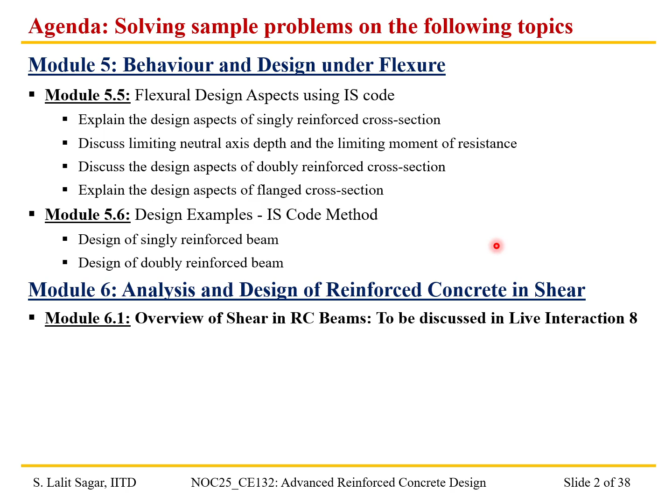In live interaction 8, we are going to take up the analysis and design of reinforced concrete members under shear as well as torsion. Without further delay, we'll be discussing almost 17 questions in today's session. This session will be a mix of conceptual multiple choice questions and numerical multiple choice questions, and I'll be here helping you solve the numerical problems and understand the conceptual problems better. So we'll start with the questions now.

The first question is, according to IS 456 2000, the code for reinforced concrete design, what is the area of the stress block for concrete in compression? And second, what is the depth of the resultant compressive force from the extreme compression fiber? Kindly take a few seconds and let me know what is the correct response.

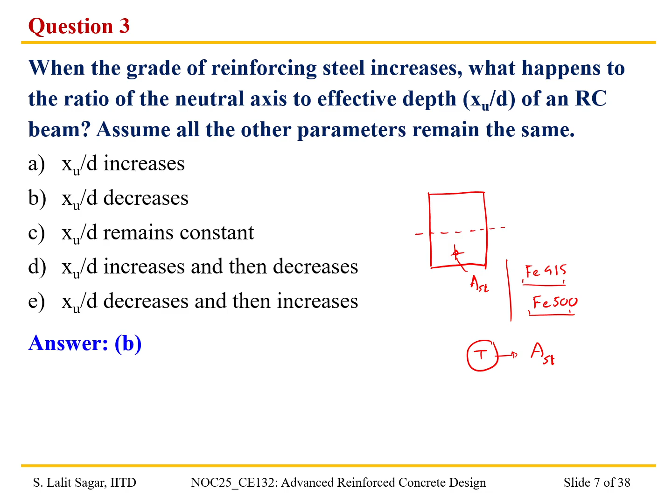The other way of looking at it is that when we increase the grade of reinforcing steel, the area of steel may decrease. So what happens is that the XU value also decreases in order to balance this tensile reinforcement, and the XU by D ratio also decreases. So using this equation, and the physical explanation based on mechanics, we can say that when we increase the grade of reinforcing steel, the ratio of the neutral axis decreases.

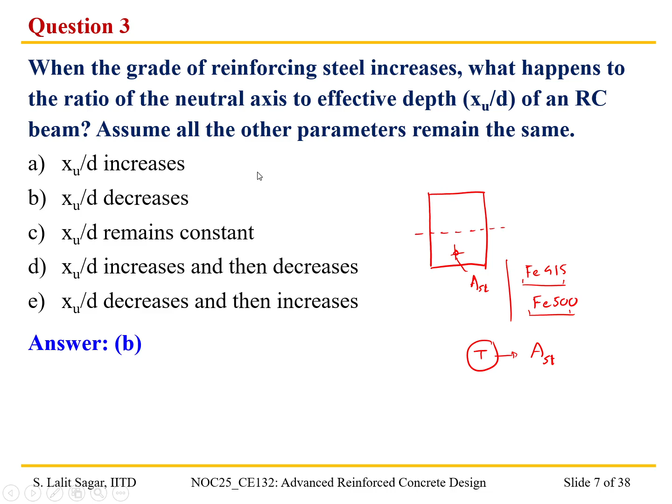So moving forward, question 4. According to IS 456-2000, a reinforced concrete beam is typically designed as which type of cross section, and what is the corresponding failure mode?

Yes sir, under-reinforced section, tension control failure. Thank you for the response.

As you rightly mentioned, option F is the correct response, because whenever we are designing a reinforced concrete beam, whether it is a singly reinforced beam or a doubly reinforced beam, we are going to design it as an under-reinforced section, and we are going to make sure that it is a tension control failure.

So in question 5, we need to answer: in the analysis and design of reinforced concrete beams under flexure, what is the expression for term R? Please take a few seconds and let me know what is the correct answer. This term R is particularly used in option B, R equal to Mu by FCK BD square.

Thank you for the response. So we look at the answer. It is option A actually, as per the design aids, that is SP16, 1980. There are certain charts which are provided in order to help us in the design of reinforced concrete cross sections.

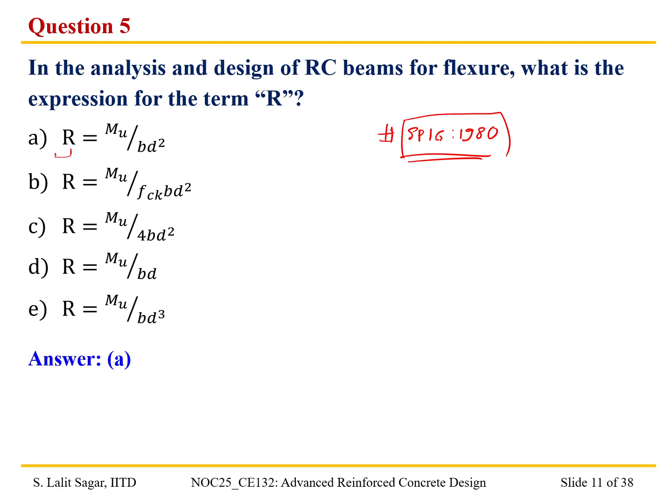According to that, we take the help of this R factor, and this has been adopted from the lecture slide also. We are going to discuss and show this R term in the SP16 design aids or the code as well. So we are going to design the cross section based on this R value. From the perspective of analysis and design of reinforced concrete members for flexure, this term R is Mu by BD squared. Kindly note that, and we will proceed with the next question.

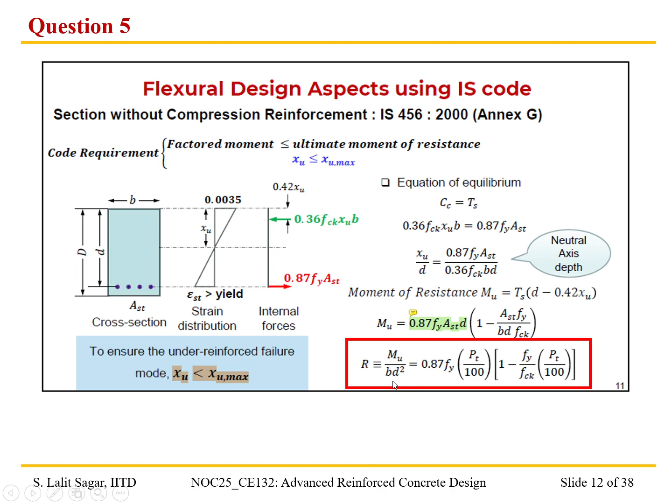As you might have seen in this week's lecture also, once you obtain the value of R, there are two methods of determining the area of reinforcing steel. We are going to look at that in little more detail very shortly. So essentially, what we need to note is that R is given by Mu by BD squared. We'll proceed to the next question.

So we have a numerical example or sample problem. We have a beam with a width of 250 millimeter and overall depth D of 450 mm. The concrete has a characteristic strength of 30 MPa FCK, and the beam is reinforced with 4 bars of 20 mm diameter, with grade of steel 500 MPa. It is reinforced only on the tension side. Assuming moderate environmental conditions, that is a cover of 30 millimeter and 10 mm transverse reinforcement being provided, what is the depth of the neutral axis as per IS 456 without considering the limiting depth?

Kindly take a few minutes and let me know the correct response. I'm going to provide a hint. What we are looking at basically is a reinforced concrete beam which is reinforced only on the tension side. So based on force equilibrium, we need to identify what is the depth of the neutral axis without considering the limiting depth.

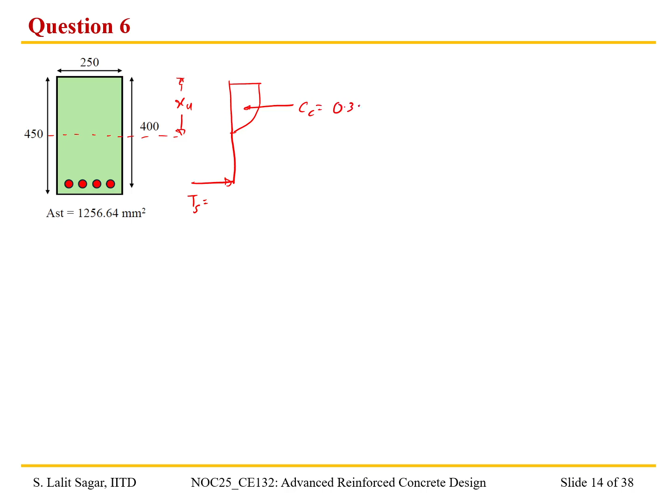As we have already looked earlier, the resultant compressive force is 0.36 FCK into XU into B, considering the width of the cross section, and the resultant tensile force in the rebar is 0.87 Fy into AST. Now, for the equilibrium of the cross section, we need to equate these two forces, that is Cc equal to Ts. Putting the forces: 0.36 FCK into B into XU is equal to 0.87 Fy into AST. So we can obtain the value of XU as 0.87 Fy into AST divided by 0.36 FCK into B. Kindly substitute these values and let me know what is the correct answer.

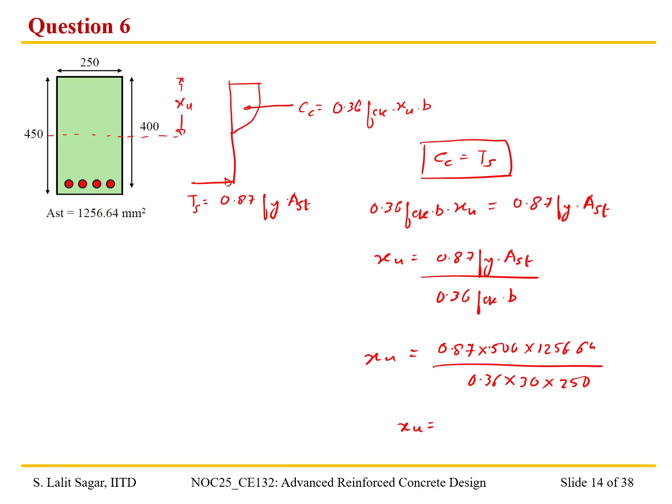Okay, so if we were considering the previous parts of the module, if we just remember the analysis of the reinforced concrete beam considering the material properties, we might have gone ahead with the depth of the neutral axis. So just out of curiosity, let us try to find out the ratio of Xu by D. Let us see what insights that is going to give us.

Okay, so Xu by D. We need to determine the effective depth. D is equal to total depth minus clear cover. Clear cover is 30 millimeter, and then we have the stirrups, that is 10 millimeter, and then another 10 millimeter, because we are going to consider half of the diameter of the tensile reinforcement.

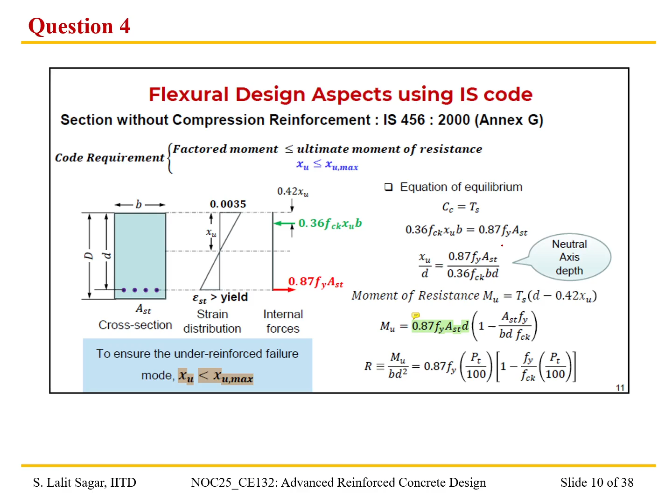Okay, for those who are wondering how this value of Xu max by D ratio is coming, I would like to refer to IS 456, table number 4.2, sir. Yeah exactly, sir. So that is the standard reference, and it has been reiterated in the lecture slides also, that for different grades of reinforcing steel, we have different values of Xu max by D, and it is essentially obtained from this strain distribution across the cross section by using the similar triangles.

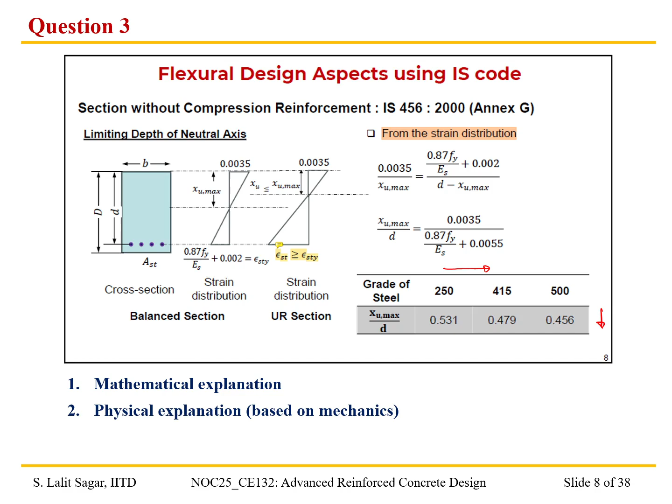So we can actually plug these values and see, when we plug different values of Fy, we get the limiting depth of neutral axis. That is the ratio of Xu max by D for Fe 500 is 0.456.

And in order to determine the moment of resistance, what would be the value of Xu? So basically, we have two values of Xu. In the previous question, as per the analysis, without considering the limiting value, we found out that it is 202.5, and presently we have 182.4. So we have 202.5 and 182.4. Out of this, which value should we consider for the analysis to determine the moment of resistance?

It's xu max. Yeah, absolutely. Yes, so you have answered correctly.

As we were discussing in the previous question, the IS code has inherently certain partial safety factors, and whenever the xu/D ratio exceeds xu_max/D, we need to consider the limiting value of xu_max/D. Correspondingly we consider the lower value, 182.4, and the correct answer for this question is option E, since the limiting depth is the same as the depth considered to determine the moment of resistance of the cross section.

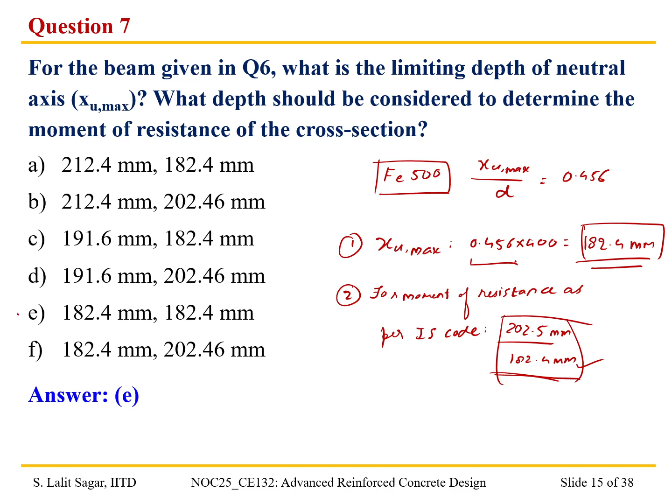So we'll move on to the next question.

For the beam given in question 6, what would be the ultimate moment of resistance and curvature as per IS 456:2000? Kindly take a few minutes and let me know the correct response. I will also start solving the problem with you.

Moment is 165.6 kilonewton meter.

Okay, were you able to solve it and obtain the answer? I used this one, 0.138 into FCK B into D square, that formula, mu limit. Okay, okay, that's great.

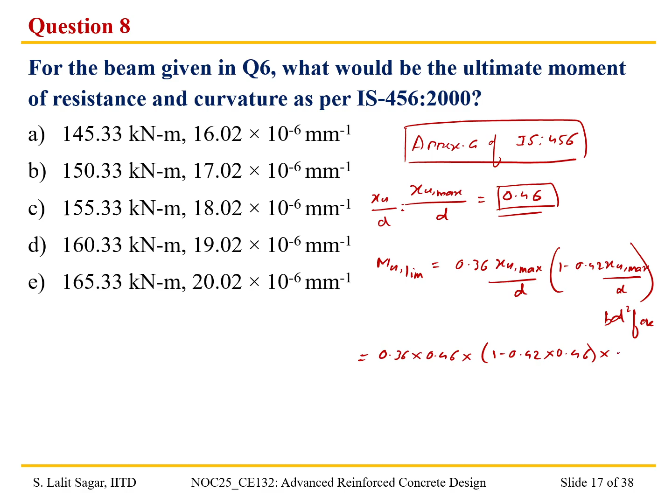Let us start plugging in the values to find the answer: 0.36 into 0.46 into (1 minus 0.42 into 0.46) into B, which is 250, into 400 square into 30. Based on this, I got a value of 160.33.

So I'm getting the correct answer as option D. Okay, sir, got it.

We can actually solve using the other formula also that you mentioned. Let me just open up the module. Sir, can you tell me what slide number you were referring to? We can cross-check with that formula also.

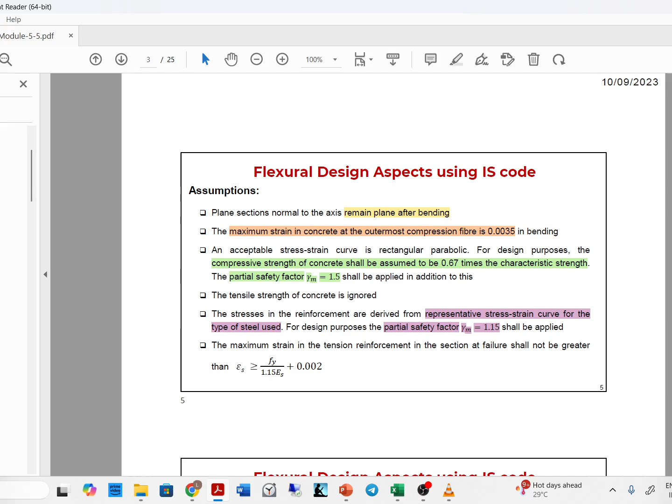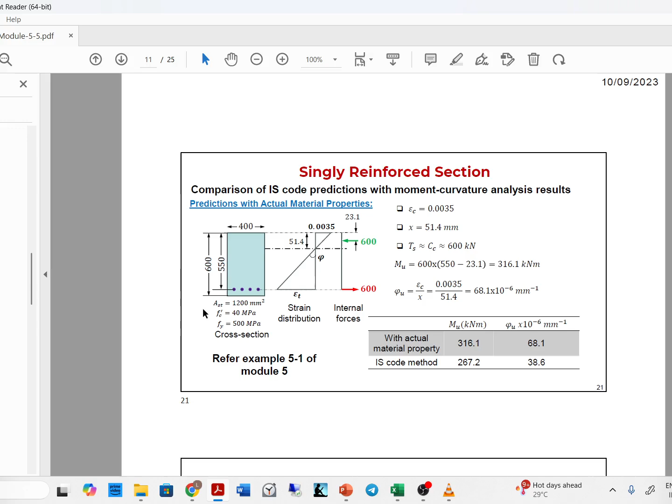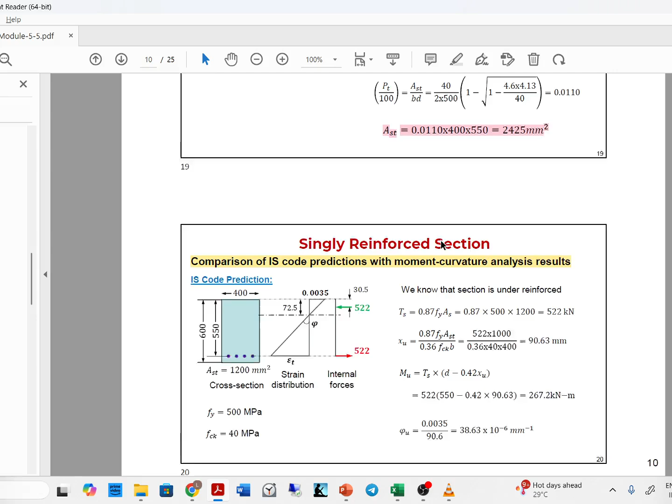Couldn't remember it exactly, but MU limit equals 0.138 FCK B into D square. Is that correct? Yes, sir. Does it correspond to FE 500 grade? That was actually FE 415. So we need to consider that this problem is for FE 500, and I think the equation might be slightly different for FE 500.

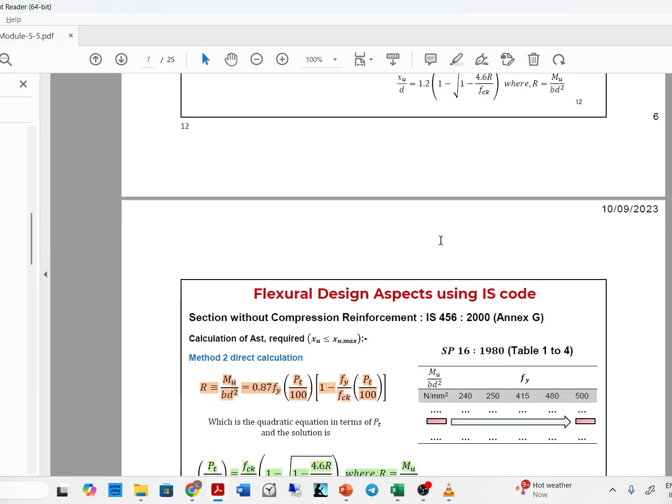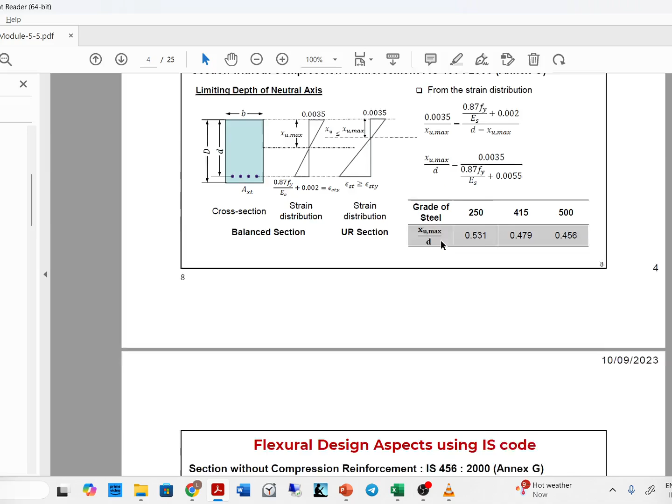I will get back to you and check what the equation is for FE 415 and FE 500. Anyway, the safe thing to do is to follow the IS code formula, which is well established. I'll look for it in the IS code, or maybe SP16, and let you know, perhaps in the discussion group. So the correct answer is option D, 160.33.

While we are at it, let us also find the value of curvature. We'll box it here. The curvature phi is epsilon_c divided by xu. Epsilon_c is 0.0035, and xu is 182.4.

Let us find out the value. So which is giving me a value of 19.02 into 10 power minus 6. Yeah, absolutely. So option B is the correct response.

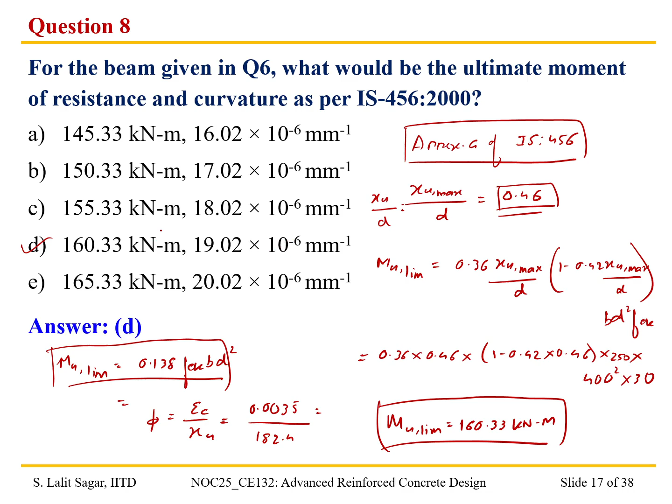So we'll proceed to the next question now. We have evaluated the moment capacity and the curvature as per the IS code. Now for this question, we need to determine the ultimate moment capacity and the curvature corresponding to the actual material properties. Kindly take a few seconds and let me know what is the correct answer. I will also start solving the problem along with you.

So how do we find out? For this, we know that we need to determine the depth of the neutral axis, that is X, by trial and error method. So we'll go to the Excel sheet and try to solve it using that. I hope that my Excel sheet is visible.

Yes sir, visible. So we'll start substituting all the values. The width is 250, depth is 450, and the effective depth is 400, and the area of steel is 1256.64, and it will calculate the percentage of tension steel automatically.

Then ASC is 0, no reinforcement on the compression side. D prime we can leave it, and F prime C, so basically the characteristic strength is very much similar to F prime C value, so I'm going to put it as 30, and epsilon prime C, that is strain corresponding to the peak stress, that is 0.002, and Fy is 500.

So we know that for the strain in concrete, when the strain in concrete is 0.0035, this Excel sheet automatically calculates the value of beta 1 and alpha 1. So alpha 1 is 0.81 and beta 1 is 0.9.

So we'll write down those values. Alpha 1 is 0.81 and beta 1 is 0.9. We have already solved several problems in order to calculate these stress block parameters, so I'm going to skip that for the time being.

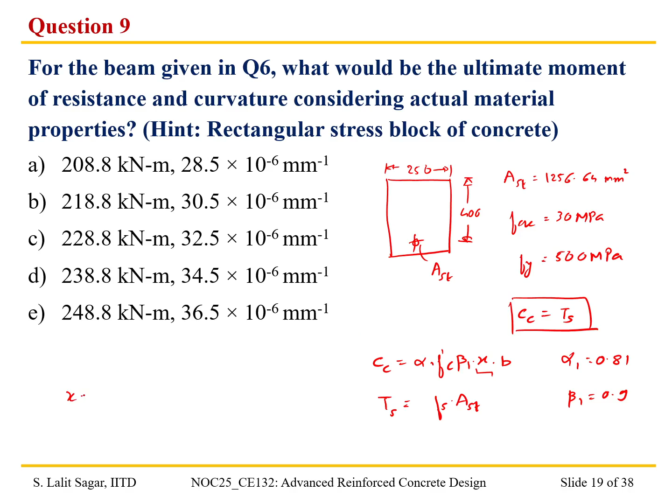So the tensile force is 628.3 and the compressive force is 628.4, so that is acceptable. So X is 114.9 millimeter.

Okay, so let us solve the problem by using the equations. So we have established the compressive force and the tensile force. Now the value of M is Cc into D minus beta 1 into X divided by 2. So first we need to find out the value of Cc, right?

So Cc is alpha 1 is 0.81, into F prime C is 30, beta 1 is 0.9, and X is 114.9, into B is 250. So can you please tell me what is the value of CC that we are getting?

628.21 kilonewton. Yeah, thank you so much. I think if we look at the Excel sheet also, we are getting the same value, that is 628.2. Let's write that, 628.2 kilonewton, sorry for that.

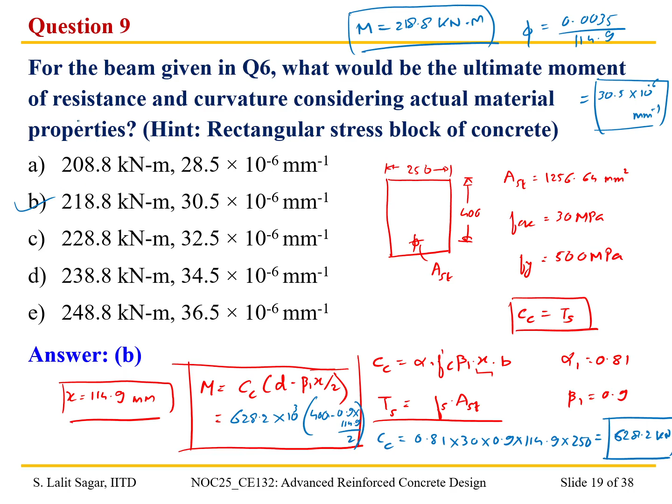So option B seems to be providing the correct answer. This is the moment capacity as per the material properties. As we can see, there is quite a considerable margin when calculating the moment capacity. So if we consider this particular cross section...

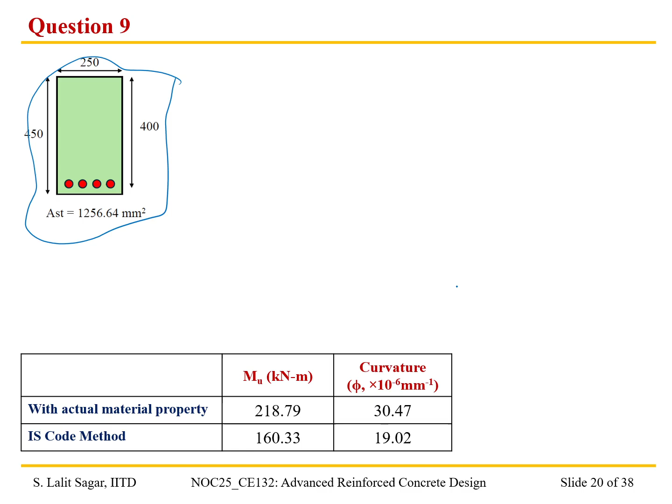Considering the actual material property, we obtain the moment of resistance as close to 220 kilonewton meter, and as per the IS code it is 160, and the curvature is 30.5 as per the actual material property, and the IS code is 19. So I think we can say that broadly there are two parameters which have affected this difference in results.

So I think the first parameter would be the limiting neutral axis depth, let me write XU. So because of limiting the value of XU, we are limiting the compressive stress block as per the IS code, and then the balancing tensile force is also less, as a result of which we get a very conservative value of the moment of resistance.

And secondly, the partial safety factors. So when we are considering the IS code, we are going to consider CC as 0.36 FCK into XU, that is the value.

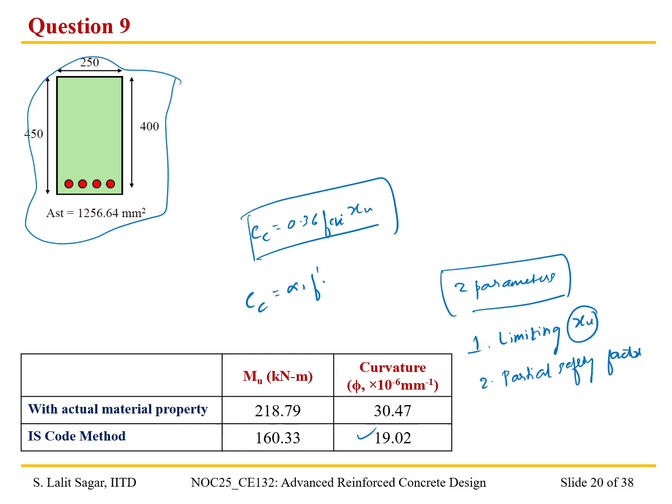But when we consider the actual material properties, CC is equal to alpha 1 F prime C into beta 1 into X. So if we consider alpha 1 as 0.81 and beta 1 as 0.9, this will become - let me just calculate - 0.9 into 0.81, that is 0.73. That is 0.73 FCK into XU.

So we can see that when we are considering the actual material property, the resultant compressive force is almost twice the IS code value, which results in higher values of mu and phi. So these are the two parameters which are the reason behind the enhanced values of moment of resistance and the curvature when considering the material property.

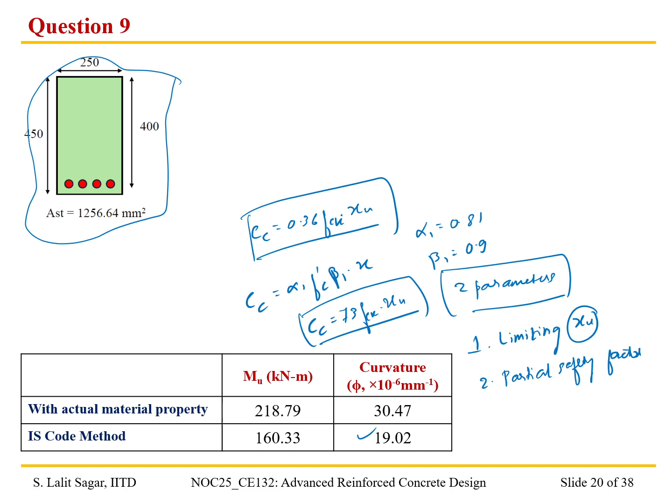Okay, so with that discussion, we can proceed to the next question, because we have another 8 questions for today. So without any further delay, we'll proceed to the next question.

So consider a beam of width 300 millimeter and overall depth of 500 millimeter, and characteristic strength is 40 MPa. If the beam is subjected to 250 kilonewton meter, will it be designed as a singly reinforced beam or a doubly reinforced beam? Please assume HYSD 500 bars are used and 10 millimeter stirrups are provided, and take moderate environmental exposure conditions. Kindly take a few seconds and let me know what is the answer.

So looking at the problem, can you please tell me what is the approach to solve this problem? So broadly, if you could tell me the broad approach, that would be nice moving forward.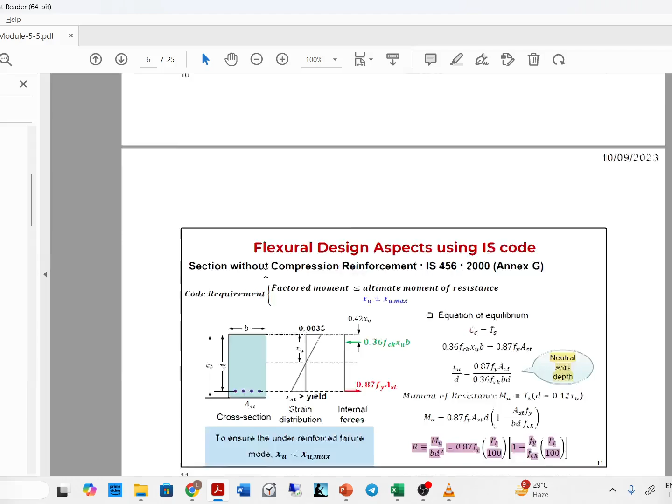If you look at this week's lecture, there are two methods given to calculate the reinforcing steel. Kindly calculate the area of steel required using the first method, that is by calculating the neutral axis depth from the moment demand. As a hint, let me go back to this week's lecture slide to help you locate where the equations are. I'm referring to slide number 12.

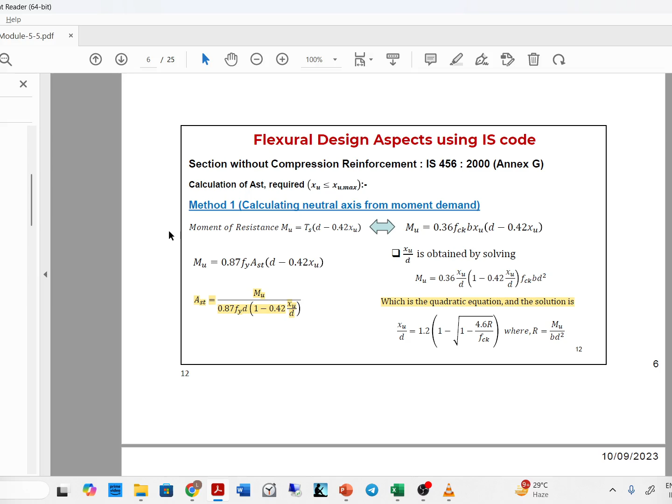So we need to calculate the value of R, which is equal to MU by BD square. Once we have the value of R, determine the ratio of XU by D, where XU is the depth of the neutral axis. Once we have the value of XU by D, calculate the value of AST. Please follow this method one. I'm going to solve it, and we're going to solve it simultaneously, and let me know what is the correct answer. Slide number 12 from module 5.5.

So we are going to obtain the value of AST using these two methods and see whether there is any difference. There should not be any difference, ideally, right? So basically, I think it's a three-step procedure that we are following over here.

So the first step is find out the value of R, which is given by MU by BD square. MU is 250 into 10 to the power 6, expressing all these in terms of Newton and millimeter. And B is 300, D is 450 square. I'm getting the value of R as 4.1152.

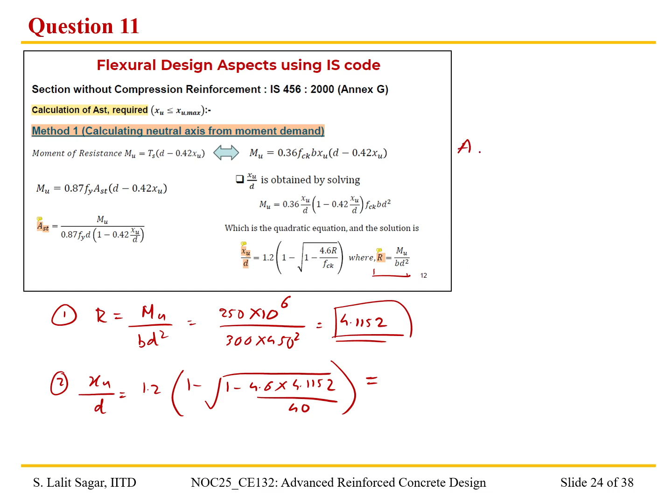Thank you for confirming that. We're going to take it up to the fourth decimal place to ensure accuracy in the calculations. Then we need to determine the ratio of XU by D. XU by D is 1.2 into 1 minus square root of 1 minus 4.6 into 4.1152 divided by FCK. The value of FCK is 40, if I'm not mistaken, which gives us XU by D, I got a value of 0.3291.

So one of the checks that I would recommend to all the students and participants is that, as we have seen earlier, this XU by D can exceed the XU max by D for the analysis using material properties. But whenever we are designing as per the IS code, it should never go beyond the XU max by D values. So for the current problem where we are using Fe500 steel, this particular value always has to be less than or equal to 0.46. This is one check that the participants can follow while solving these problems.

So we obtain the value of XU by D, then we can substitute that value in this equation. MU is 250 into 10 to the power 6 divided by 0.87 into 500 into D is 450 into 1 minus 0.42 into XU by D, which is 0.329.

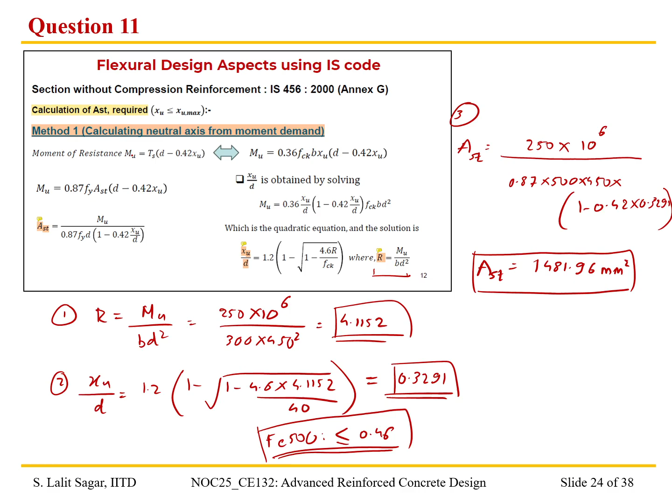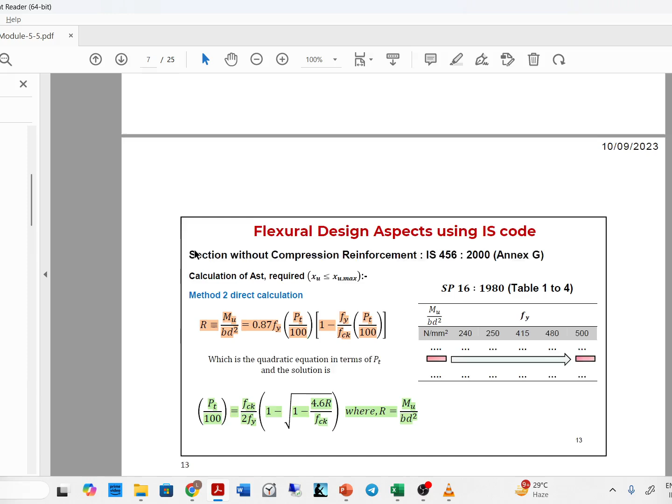So having found out the AST of the first method, let us proceed to take up the next problem. In the next problem, we are going to use the direct calculation method. I will show the hint once again. We have already found out the value of AST from method 1. In the direct calculation method, we are going to obtain the AST directly. First step is we are going to find out the value of R, which we already know, and then by using this equation, we are going to find out the value of PT, and from PT we are going to obtain the value of AST. So first step is find out R, which you already know, then find out the value of PT, and from PT we'll find out the value of AST. So we can start solving the problem together.

Okay, so we already know from the previous.

So from the previous part of the question, we know that R is equal to 4.11.

Okay, thank you for that. Going to write it here. So the first step is R is equal to mu by bd square, that is 4.1152.

So let us proceed to the second step, that is pt by 100 is equal to fck. Okay, let me write down the equation once again for better clarity: fck by 2fy into 1 minus square root of 1 minus 4.6 r by fck.

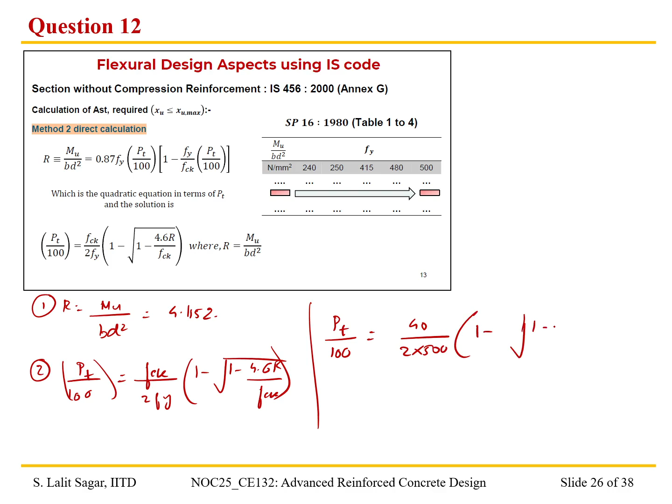Okay, we'll substitute the values and determine what is the value of pt that we are going to get. So pt by 100 is equal to fck is 40 by 2 into 500 into 1 minus square root of 1 minus 4.6 into 4.1152 divided by 40.

So when we solve this... let me write down the value of pt: 0.0109. I'm getting 1.09. In the percentages, no sir, like you have to multiply it by 100 to obtain the value of pt. So please check and let me know if you're getting this. Yes sir, we got it, 1.097. Yes, thank you.

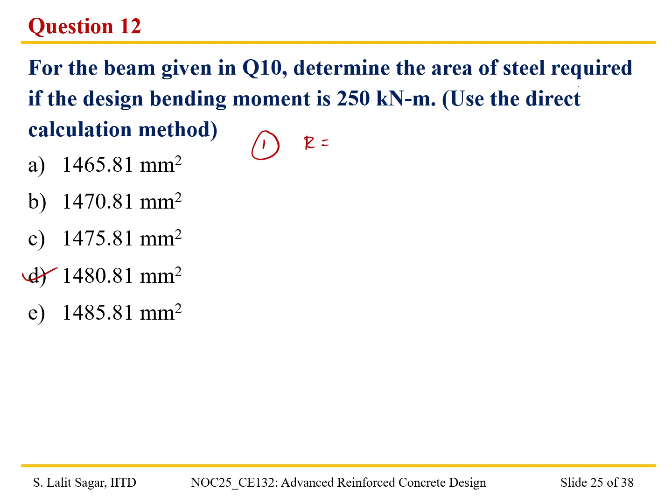So we'll go back and check what is the value of A that we got previously. So it is 1482, 1480, 1480.8, which is quite close. So in your assignments or exams, since we have validated both these two approaches in order to obtain the value of AST, please feel free to use either of them, and both will get you the same answers.

So with that, we can proceed to the next problem. I think for today we have another 5 questions and another half an hour, so we are doing well time wise.

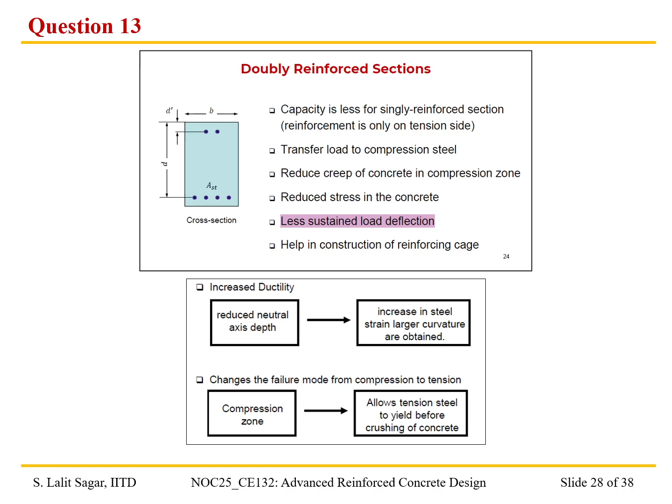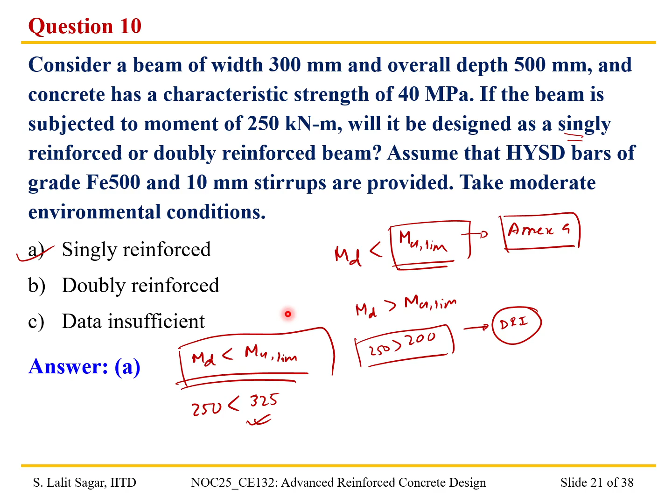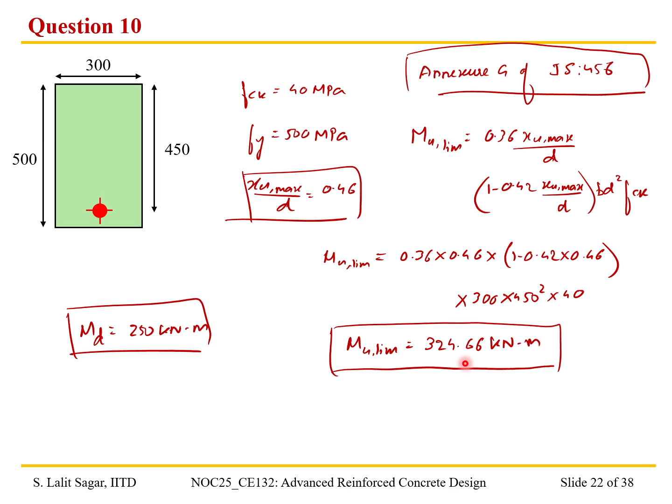The question we are presently discussing is the same as question 10. Width is 300 mm, depth is 500 mm, FCK is 40 MPa, and the HYSD bars have Fy equal to 500, with effective cover again 50 millimeter. So we can make use of the mu limiting value to obtain the answer for our current problem. Please note that mu limit is 324.66 kilonewton meter.

We are presently in question 14. In order to obtain the compression reinforcement, we use this value: mu minus mu limit is equal to FSC into ASC into D minus D prime. I think we have all the data required to obtain this value.

Let us have a look at this equation for a moment and try to see what we have and what extra data we need to solve this problem. We have the value of mu as 600 kilonewton meter, and mu limit is 324.66.

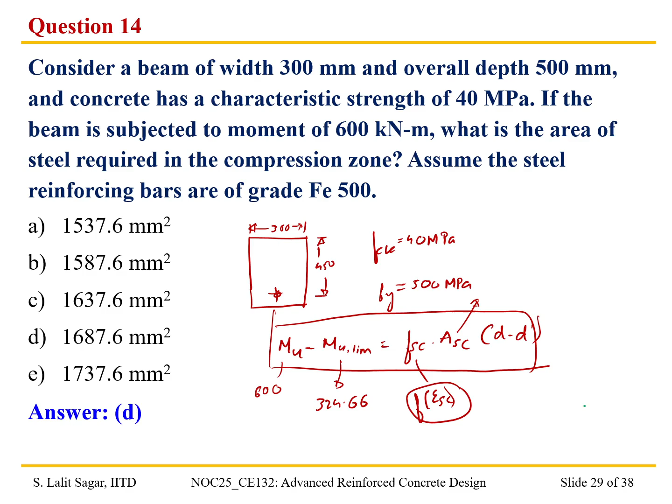So I think option D is giving us the correct value. So by using this equation and then by linear interpolation, we can obtain the strain, the stress corresponding to the strain in the compression steel. By using this equation, we were able to obtain the area of steel in the compression zone.

Okay, so we'll proceed to the next question now. So for the beam given in question 14, what is the area of steel required in the tension zone? We can start solving the problem now.

You can use the MU limit formula, sir. For which one, sir? This one? Yeah, sure, we can use that. Please wait for a moment, I'm going to solve it using the shortcut method. Okay, it's okay, sir, based on what sir has solved in the class, and you can use the same in your assignment as well as the exam also.

Right, so from the lecture slides, we can see that for the tension reinforcement, you can use this method where the value of PT limit by 100 into Fy by Fck can be simplified to a certain value depending on the grade of steel. So I'm going to start with this.

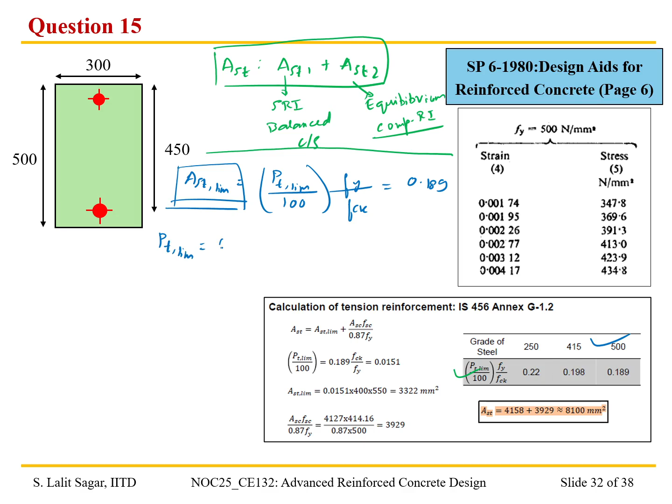So PT limit is equal to 0.189 into 100 into Fck is 40, Fy is 500. So when I simplify this, I'm getting a value of 1.512. So the PT limit value is 1.512.

Further, this PT limit is nothing but AST limit divided by BD into 100. So AST limit is equal to PT.

PT is 1.512 into B, which is 300, D is 450, divided by 100. Can you please tell me what is the value of AST limit? 2045.25 mm square. Thank you for the response.

I'm getting 2041. So this is AST1, the balanced area of steel for a singly reinforced beam. So now we need to obtain AST2 in order to balance the compression reinforcement. Let us do that now.

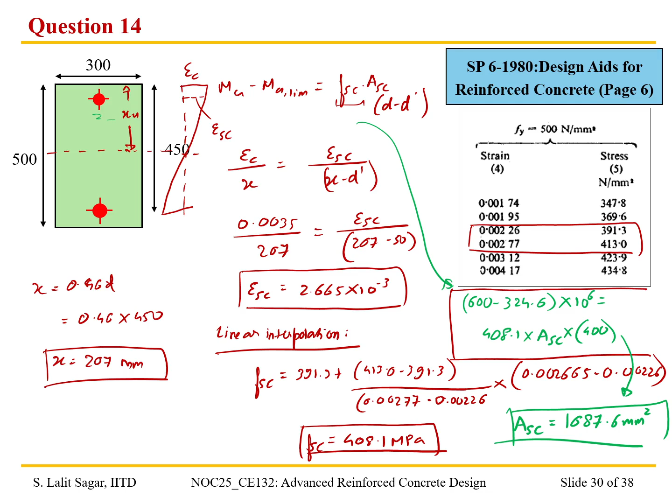So from this we know that FSC is 408.1 and ASC is 1687.6. Let me plug those values into this equation. FSC is 408.1 into ASC is 1687.6, divided by 0.87 into 500, which gives us the value of AST2 as 1582.42 mm square.

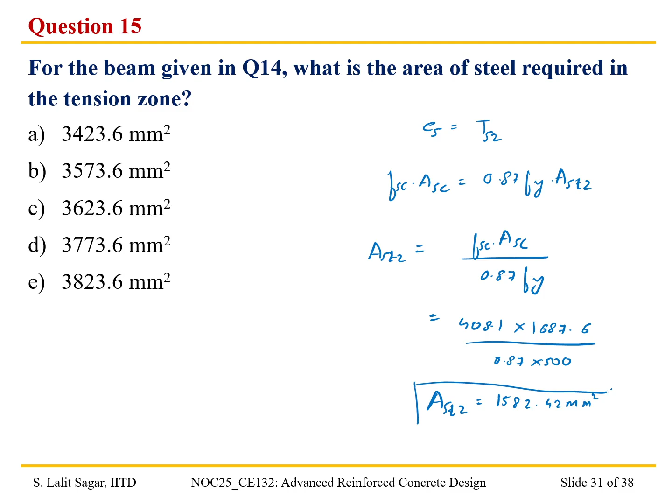As I said earlier, in order to obtain the total AST, AST is equal to AST1 plus AST2. Let me take a different color. So AST2 is 1582.42. What was AST1? AST1 was 2041.2. So the total AST turns out to be 3624.2, yeah, 3624 mm square.

So option C is the correct response. Thank you for confirming the answer.

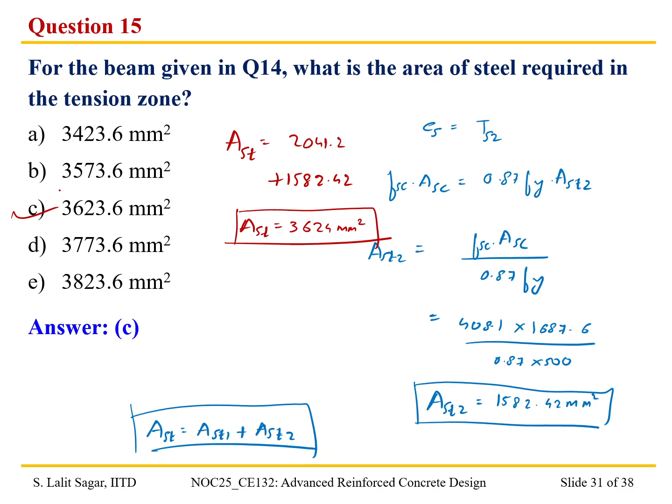So in this way, once we determine the value of ASC, we can obtain the value of AST. As I told earlier, AST comprises of two components. The first is the balanced steel corresponding to a singly reinforced balanced cross section, AST1, which has different values for different grades of steel. AST2 is obtained by equating with the force in the compression steel. Adding AST1 and AST2 together, we obtain the value of AST, and finally we get the answer.

So I think we have an opportunity to solve it using the Excel sheets. I'm going to start reading the data now, and then we can start solving the problem together. We have a reinforced concrete beam of dimensions 300 by 500 millimeter, and the value of FCK is 40 MPa. The beam is reinforced with 4% steel on the tension side and 2% on the compression side, and has an effective cover of 50 millimeter on both sides. What is the ultimate moment of resistance and curvature as per the IS code?

Okay, so we need to determine the ultimate moment of resistance and curvature as per the IS code. Kindly take a few seconds and understand the data, then we can start solving the problem simultaneously. Since this is an analysis problem, we need to take the help of the Excel sheet in order to solve it.

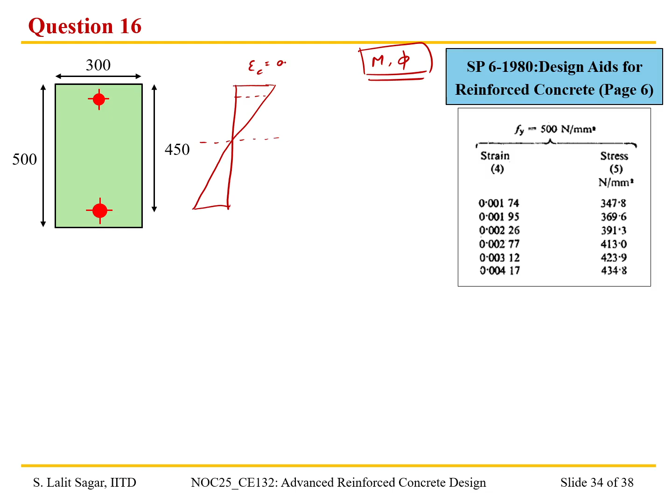So I think we already have the data over here. We need to determine the moment of resistance and the curvature as per the IS code, and we can take the help of this stress strain data in order to solve the problem. Let me draw the strain distribution across the depth of the section. We have epsilon c is equal to 0.0035, and then we have epsilon sc, steel in compression. Then we have epsilon s, and here this is the depth of the neutral axis, that is x.

Okay, now we have the stress block diagram. This is the tension in reinforcing steel, and this is the depth of neutral axis. It follows a partly rectangular and partly parabolic profile. This is the resultant compressive force in the concrete block, and here we have the compression from the steel.

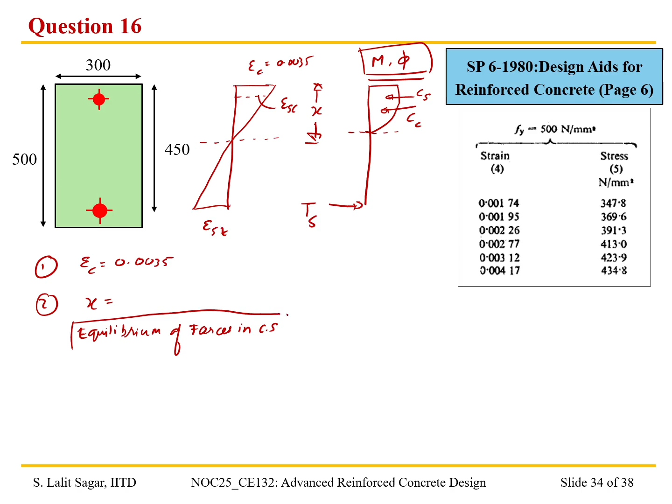In order to obtain the moment of resistance, we need to take the value of epsilon c as 0.0035. Now we need to select the value of x so that there is equilibrium of the cross section, equilibrium of forces in the cross section. So how do we achieve that equilibrium? I'm going to write it here. Basically the two compressive forces should be equal to the tensile force.

And this Cc is, please note that we are doing the analysis as per the IS code, 0.36 FCK into B into XU, that is Cc, plus FSC into ASC, is equal to FST into AST.

And we are going to obtain these values based on the strains that we have.

Now, it is not possible to straight away take a value of x and check for the equilibrium. So for that, we are going to take the help of the Excel sheet right now.

So this Excel sheet has two components: one based on the material properties, and this based on the IS code. I've taken this stress strain curve from SP 6. Let us plug all the values and see.

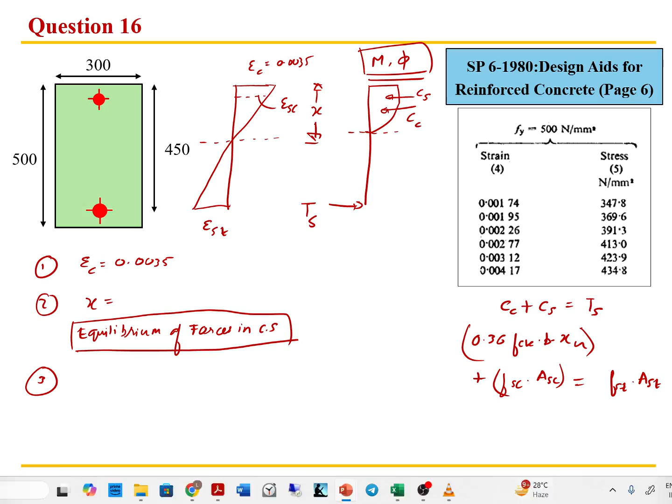Before that, let us calculate the area of steel in compression and tension. Sorry, I should have done that earlier. So now we have AST and ASC.

AST is 0.04 into B D, capital D, that is 300 into 500. And this is 0.02 into 300 into 500. So we get the value of 6,000 mm square, and this is 3,000 mm square. This is AST and this is ASC.

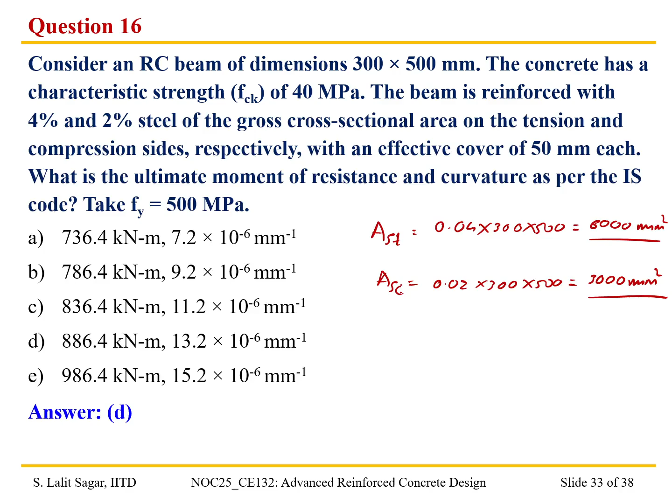So we'll go back to the Excel sheet. 300 by 500, effective depth is 450, and then AST is 6000, it will calculate the percentage steel automatically. Then the compression steel is 3000, corresponding percentage is 2%. D prime is 50 mm, FCK is 40 MPa, as we have seen. And then the strain corresponding to the peak stress is 0.002.

Then Fy is 500 MPa, and there is no axial force, corresponding to a strain of 0.0035. Okay.

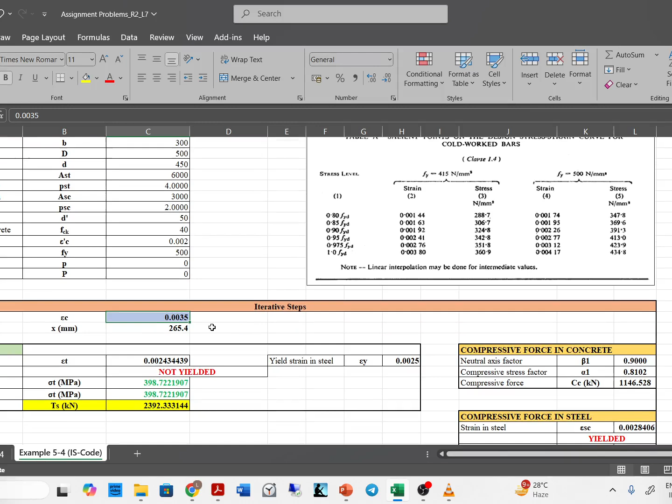In fact, this X is already balanced because I already used this while creating the problem for today's session. So we can see that for a value of 265.4, the tensile force and the compressive force, both of them are equally balanced. We'll do some hand calculation and find out how it is getting balanced over here.

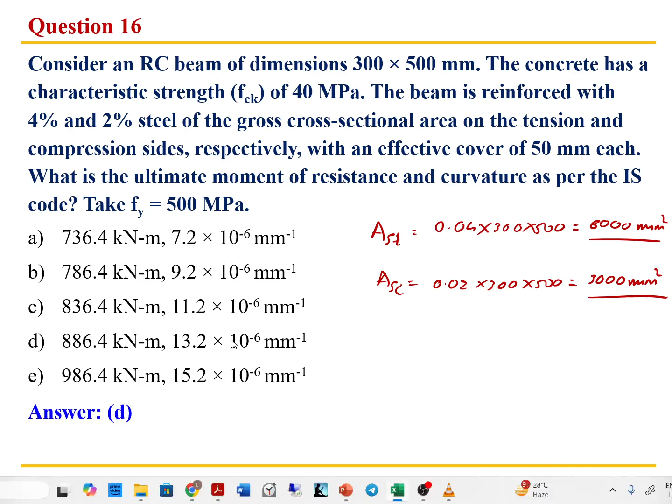Now let us check what is the value of xu by d, just out of curiosity. X by d, that is 265.4 divided by 450. Can you please tell what is the value? 0.59, yeah, thank you.

So this 0.59 is greater than 0.46, and still it is permissible because it's a doubly reinforced cross section.

Once we have obtained the value of X, let us find out the stress in the compression steel. Now, from the stress block, we have epsilon C by X is equal to epsilon SC by X minus D prime.

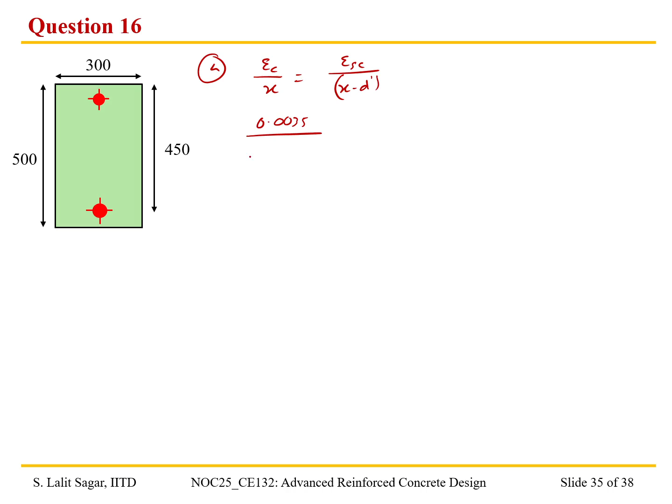0.0035 divided by X is 265.4 is equal to epsilon SC by 265.4 minus 50. So solving that, we get epsilon SC as 0.00284 or 5. Correspondingly, from linear interpolation, 0.00285, it has to be between these two values. Correspondingly, I get the value of FSC as 415.2 MPa.

Now we have all the stress values obtained. Now we are going to check for the force equilibrium. I will check for the force equilibrium.

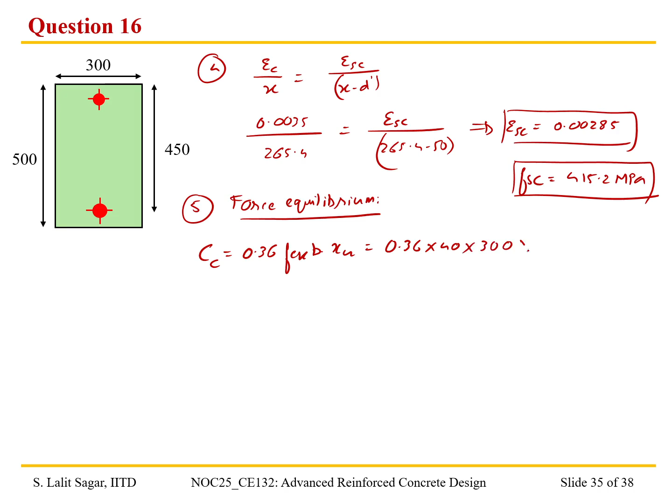Let us start with the compressive force in the concrete, that is 0.36 FCK B into XU, that is 0.36 into 40 into 300 into 265.4. And then CS is FSC into ASC, and we have TS is equal to FST into AST.

Now we have 415.2 into ASC, how much? 3000, I guess. And here FST is 398.7 into 6000. So CC I'm getting it as 1146.5 kilonewton.

And then CS is 1245.6 kilonewton. And then TS is 2392.1 kilonewton. So from this, we are able to obtain the equilibrium of the cross section: CS plus CC is equal to TS.

So once we get the force equilibrium, we need to obtain the moment value. Now let us take the moment about the tensile reinforcement. That is M is equal to CC into D minus 0.42x plus CS into D minus D prime.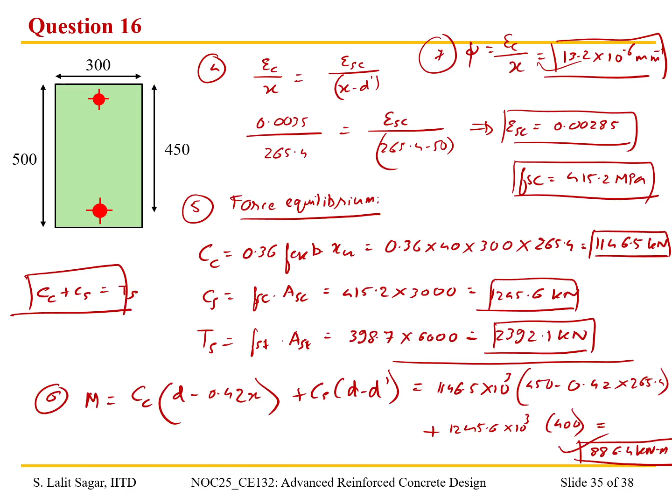I hope that you were able to obtain the answer, sir. Yes, yes, okay, okay. So again, option D is the correct answer.

So we'll finally proceed to the last question for the day, and I'm not going to burden you any further. We are going to solve this using the Excel sheet.

I know the previous problem was a bit intensive, so we're going to solve it using the Excel sheet now. Do you have the comparison? No, not yet. Okay, so for the same problem, we need to obtain the ultimate moment of resistance and curvature using actual material properties.

So we know what is the difference between the actual material properties and the IS code. Let me write it for better clarity. So we have the analysis of RC section: the first is using the IS code, the other is using the material properties. When using the IS code, we have partial safety factors; on the other hand, with material properties, they are based on the stress block parameters.

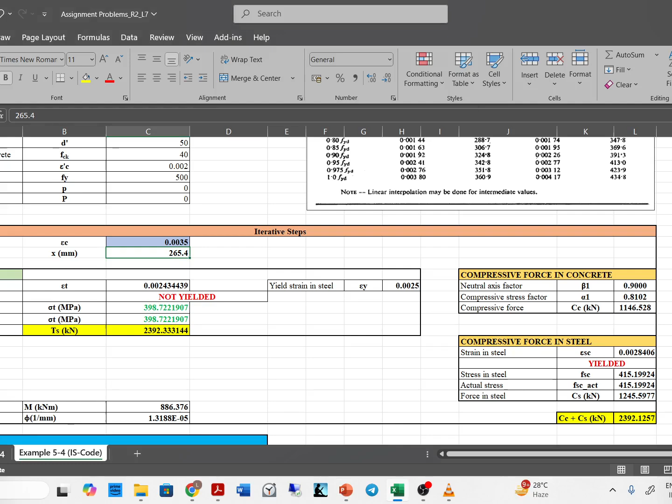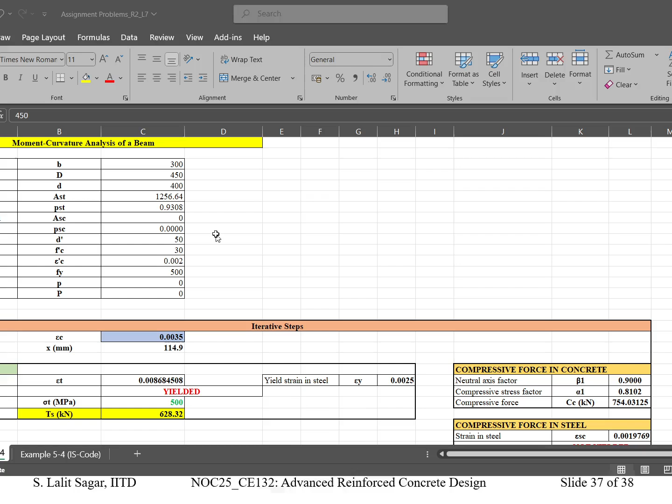Okay, so we can start solving it. We'll go back to this. Yes, we have this: width of the cross section is 300 and the depth is 500. Effective depth is 450 and Ast is 6000 mm square, 4%, 3000. And then the percentage of compression steel is 2%. D prime is 50 mm. F prime c or fck is 40.

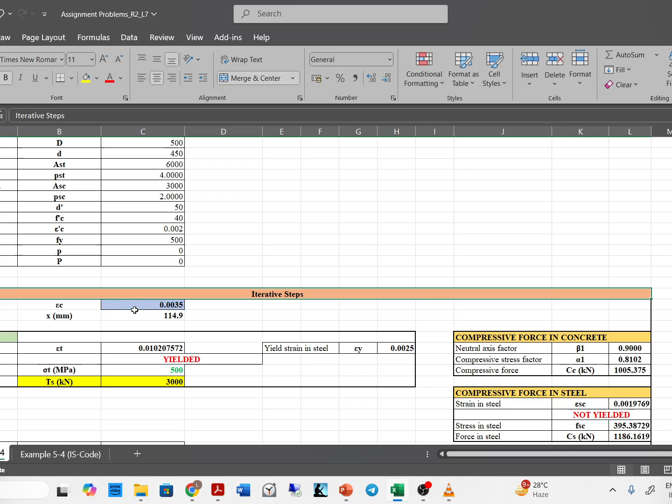Then epsilon prime c is 0.002, fy is 500. The first step is we assume the strain in concrete, that is 0.0035. Then we calculate for the force equilibrium in the cross section, that Ts should be equal to Cc plus Cs. We have the stress block parameters alpha 1 and beta 1 automatically calculated corresponding to the value of strain in concrete. Now we see that Cc plus Cs is less than Ts.

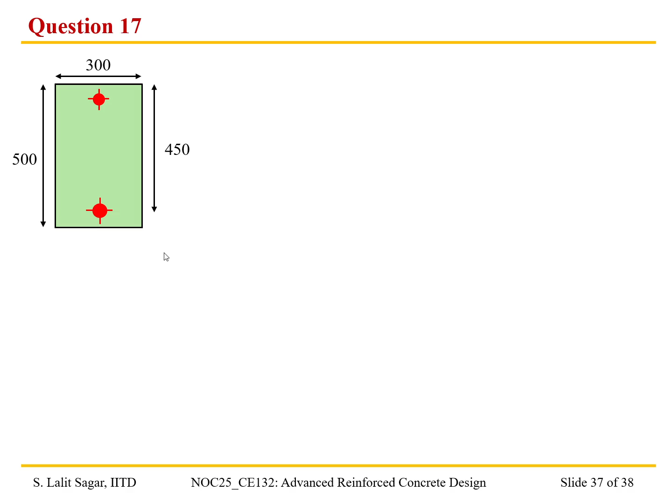So we'll increase the value of x, the neutral axis depth. Now I'm getting that corresponding to a value of 172.45, I'm able to achieve equilibrium of the cross section where Cs plus Cc equals Ts, that is 3000 kilonewton, for x equal to 172.45 millimeter. So for x equal to 172.45 millimeter, we're able to obtain the equilibrium, Cc plus Cs equal to Ts.

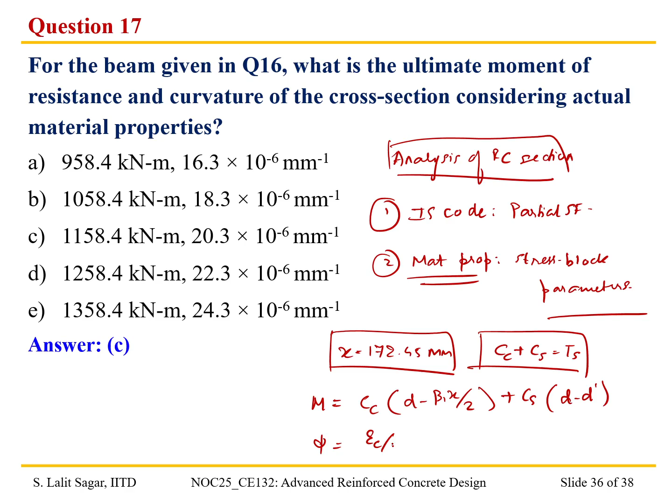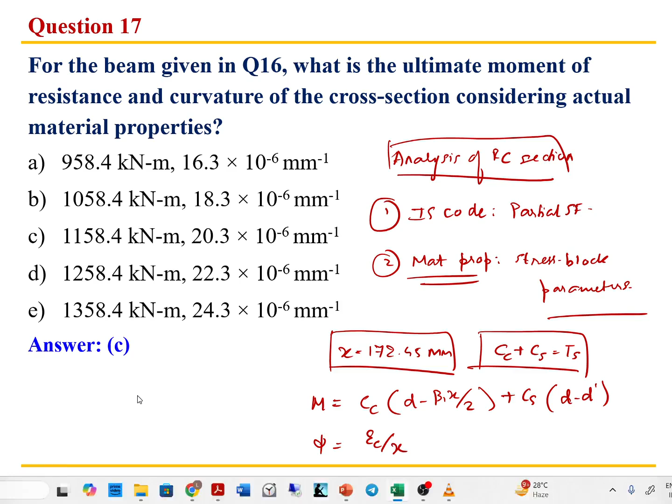Now we can find the value of M using the actual material properties. M, taking moment about the tension reinforcement, is Cc into d minus beta 1 into x by 2, plus Cs into d minus d prime. And phi is equal to epsilon c by x. So from the Excel sheet, we get the values of M as 1158, and phi as 20.3 into 10 to the power minus 6. So option C is the correct answer.

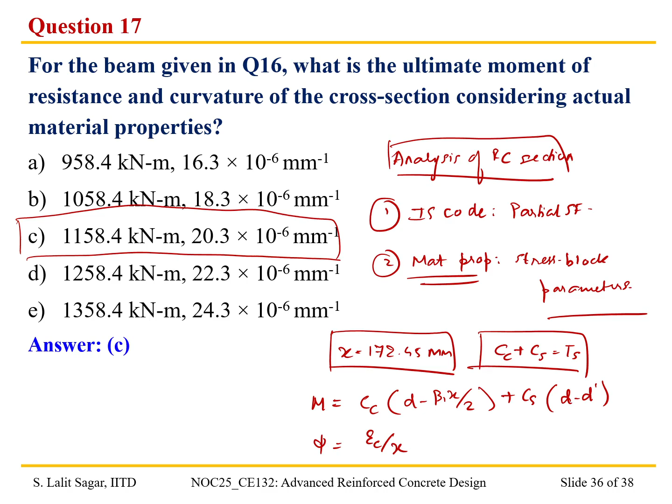Okay, so with that we will conclude today's session. If there are any questions, please feel free to post them on the discussion portal. And next week we're going to be taking up design for shear force and the torsional moment.

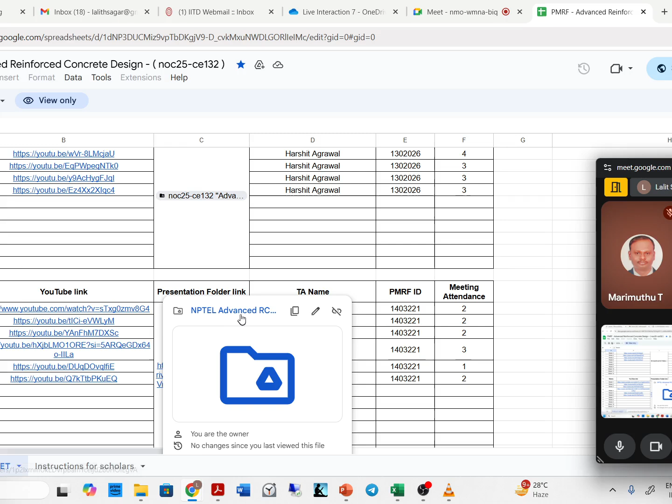Okay sir, got it, okay. So this Excel sheet, can I get it, sir? How can we get the Excel sheet? There is some disturbance, yeah, thank you for that. Sir, like you might be aware, there is one Excel sheet where all our recordings are available. So this is the data sheet where everything is available, right? So if you go to this Google Drive, all my presentation slides are there. So I'm going to upload my Excel sheet here, so you can access it and use it for solving the assignment problem and the exam. Okay sir, thank you. Thank you, sir. Thank you. See you again next week. Sure, sir, thank you. Good night.